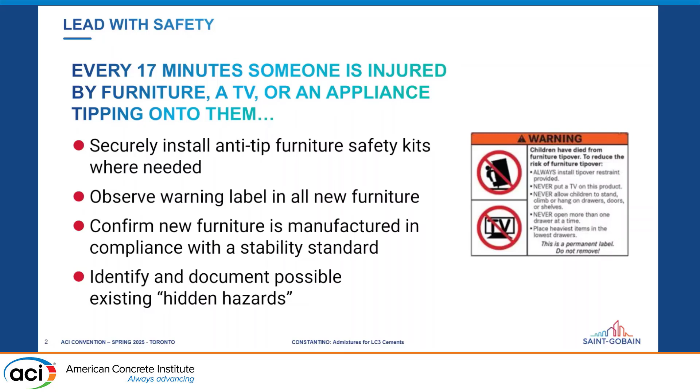And you do that because in the United States, every 17 minutes, somebody is injured by a furniture tip-over type of accident. So if we can avoid it, please, let's be sure we keep our family safe. And when you buy furniture, there is an ASTM for that. I know we look at ASTM for testing slump and air and whatnot. There are ASTM standards specifically to test furniture tip-overs. Be on the lookout for it, and we'll be a little safer.

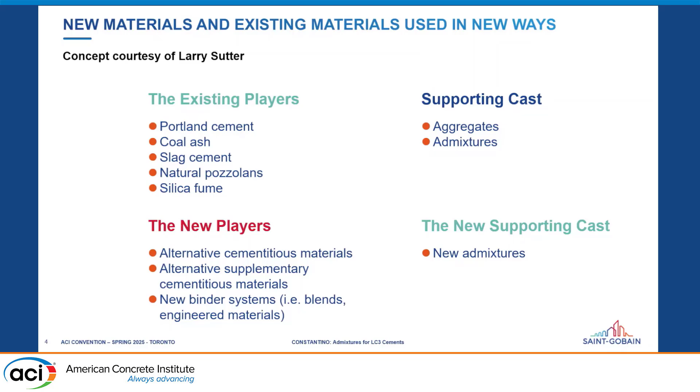And just as I mentioned that the fly ash is no longer fly ash, but it's coal ash in the spec, the same is happening across the board. The same 595 standard that you might have used in the past is not the same as it used to be. So a lot of it means you can do more than you thought you could. All you need to do is go back and reference some of those standards.

And when you do that, you'll see that the LC3 cements that we're going to talk about today, technically speaking, there's no impediment for them to be manufactured. The trick is going to be the pairing with the market and when the technology actually is scaled up to perform.

I have listed here also, courtesy of Larry, a bunch of updates in terms of what's ahead, a lot of activities in progress. So we will be able to have those alternatives that I talked about much more up close and personal in our regions. There may be more advances in one geography in North America, but it's going to be throughout our industry overall.

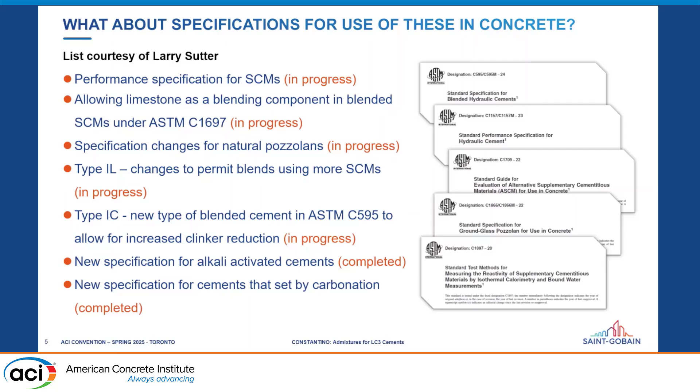So I'm talking background about the LC3 cement, right? And I'm saying all this is new, or sounds new. But then I have to recognize Karen Scrivener, who was here in the convention. If you haven't met her, she comes here every once in a while. She actually, 17 plus years ago, said the following: this material, and I'm going to ask you what the material is, has the potential to cut CO2 emissions related to the cement by more than 400 million tons a year at a global scale. What material is that?

Calcined clay. Okay, so I'm done with my presentation, right? So, thank you. We can all leave early.

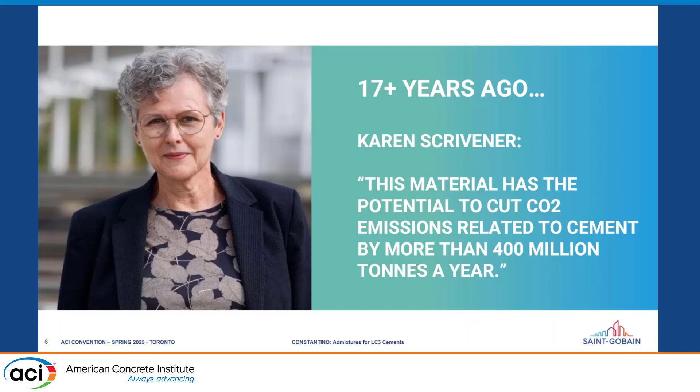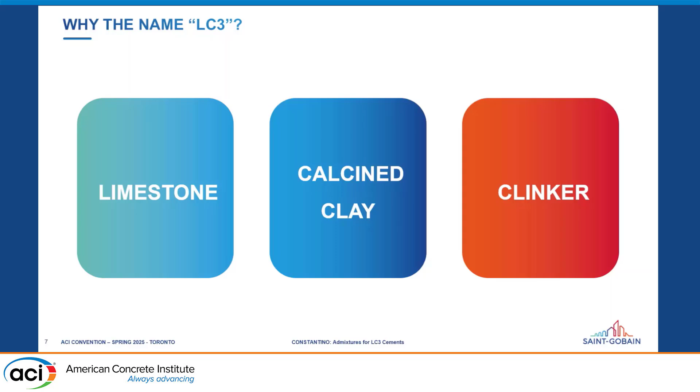Absolutely, calcined clay, but I don't know if everybody is aware of that, so I decided to just make a whole slide for it. Why LC3? And I think it should be obvious. There's an L in limestone, there's a C in calcined, there's a C in clay, and there's a C in clinker, so LC3. They actually put it with a 3, usually as an exponent. But so LC3 plays a role in this, and that's, again, the cement that we're going to concentrate on.

That being said, this is one lever that the industry is pulling to achieve lower carbon intensity in concrete. It's one of them. Doesn't mean it's the only one. And when you look at the alternatives that I was talking about earlier, these are the new SCMs, or old materials being used now differently. You can see a whole series of options out there that are going to be entering the market because of those standard updates that I just mentioned.

Now, why do we need this? Because LC3 has got one edge over a lot of these other things. Everybody's talking about how much slag cement we're going to have in the future in terms of volume. Is it going to be available in all the markets? With coal ash or fly ash, many people are saying, well, now we've got to harvest because there's not enough fresh ash generation. And how long is that going to go?

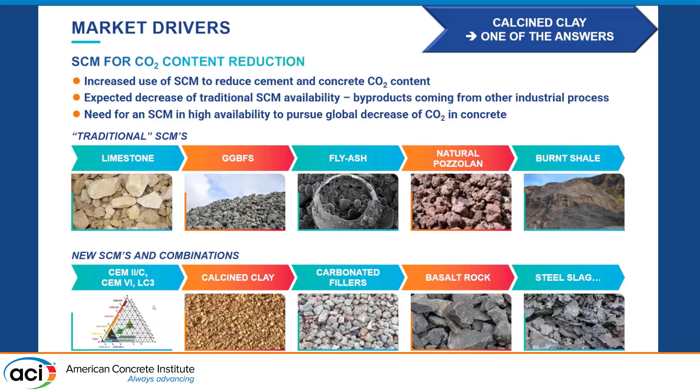And so the question is, how can we do that in the most practical fashion? And that's what gave birth to the calcined clay concept. At this point, there are probably more than 40 now, but 40 cement producers in about 25 countries working on LC3. So that's an up-and-coming attraction. Just like IL surfaced and appeared in many markets very fast, it'll be probably another 2-3 years maybe that we're going to start seeing the entry of these kinds of materials, at least in the United States.

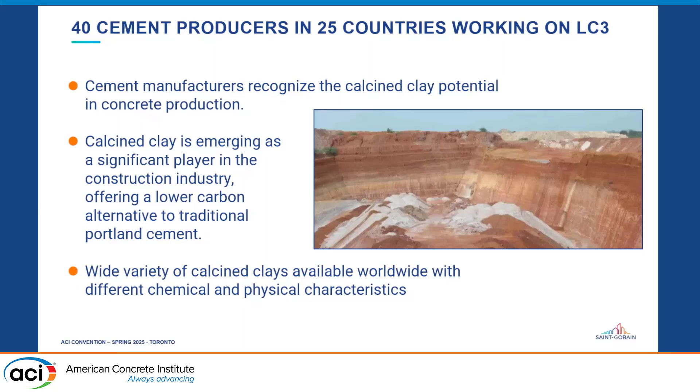It is already present, for example, in Colombia. I know we've worked on that there. And Europe as well. So other parts of the world are already seeing it. But I'm just talking specifically US, maybe a couple of years away, given that there's some investment devoted to prepare industry to have calciners on site to prepare the LC3 formulation. So an up-and-coming attraction there.

And the why behind it has to do with just pure math. If you already have clays all over the world and you already have limestone all over the world, you can still have clinker. And now with material like calcined clay all over the world near cement plants, you can actually have as much powder as you need. If you compare those two boxes over there, clinker, calcination temperature 1450 C plus or minus, overall round figures, you're going to look at about 800 kilos of equivalent CO2 per ton.

Now, the calcined clay is not zero, and many of us are used to saying, yeah, I'm going to put ash in my concrete so that every ton of cement I get out is a ton of savings of CO2. It's not a binary 1-0 situation here. Calcined clay does produce CO2, but because the calcination is at a much lower temperature and so forth, the process can actually save a significant amount of CO2. So even though you're still going to be making CO2, you need other levers for the net zero approach. This one actually helps tremendously to cut the binder part in terms of emissions attributable to the material itself.

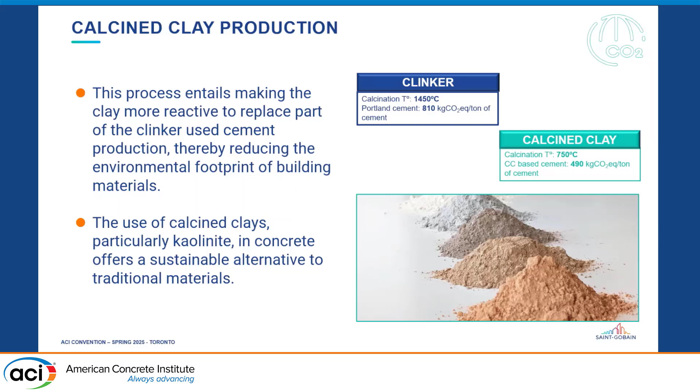And the formulation, if you will, just compared to what we have of ordinary Portland cement, which tends to be just clinker with a little bit of gypsum, and that gives you the ordinary Portland cement concept. The formulation would be proportioned as such. About half would be the remaining clinker that you used to know as Portland cement clinker, but you would also have 30% of that volume be the calcined clay. And then you would add about 15% limestone, which is where the industry is right now, with your gypsum.

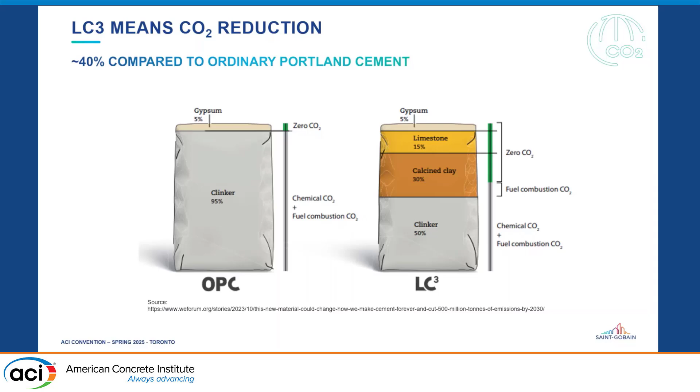This is probably not final in terms of what will be unique in your market, but directionally speaking, this is a formulation from the LC3 concept. So as background, I wanted to offer this as a starting point. And now we get to actually replace some of the clinker with the calcined clay. Yes, I have a picture of a fancy instrument because a lot of the testing that we talked about earlier, I think Georgia Tech is really doing, they put a picture of all the instruments that they're using to characterize materials in the lab.

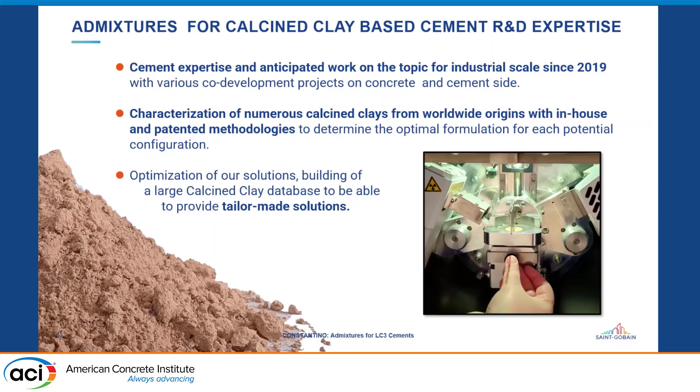You're going to need access to good friends, collaborators, maybe alliances with organizations, companies, what have you, to help you navigate the waters, because you will have to do some work to characterize these materials in a way that you can actually address the performance needs. One way to address performance, the way we do it, is you start looking almost like a spider web, and this is representative. It's not the only one. Other people can do it differently. But you're going to look at the opportunity where the variety of clays are going to give you different performance.

This blue line is one particular calcined clay. This orange is another calcined clay. Which one are you going to get? You're going to have to do the work to find out. And work with your suppliers, your consultants, your team, your experts to do that. Those charts on the right-hand side are basically a summary of different calcined clays that we have actually investigated in our facilities, among others, because we've done it across the globe. But each one is a different calcined clay.

Which one is for you, again? You are going to have to understand, for example, in the colors in the bar, how much is quartz, how much is kaolinite. And that word, you will remember me. When you look at LC3 and you look at calcined clay in the future, kaolinite is going to be one factor that you're going to pay attention to.

So if you remember one thing from today, it's that you're going to be looking at that. Just like today, you say, well, I want to know what my C3S is. Everybody wants to do that in traditional ordinary Portland cement. You want to keep an eye on that, and that's going to be one of the conclusions. So I'm telling you what I'm going to tell you, I tell you, and then I tell you what I told you, right? So remember that one, because overall it's going to be important for you to keep an eye on that.

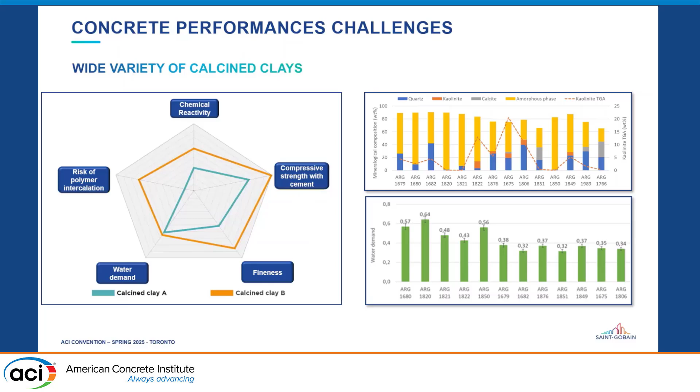You see the diversity and the variances in terms of what's in the calcined clay, and you will see the impact when it comes to water demand. It could be double from one to the other. And we are used to using chemical admixtures in order to deal with water demand. So what product you're going to need other than water to control that is going to be important. Particle size distribution also varies widely.

So you can imagine that in order to tune your performance, you're really going to have to have a good handle on it. So in a way, I'm saying, let's fasten our seatbelts. It's going to be a fun ride ahead. If we do it in anticipation of what's ahead, then we can put our arms around it. In other words, there's work that we should start doing now so that when this comes about in 2 years, we basically have connected the dots in a way that's efficient.

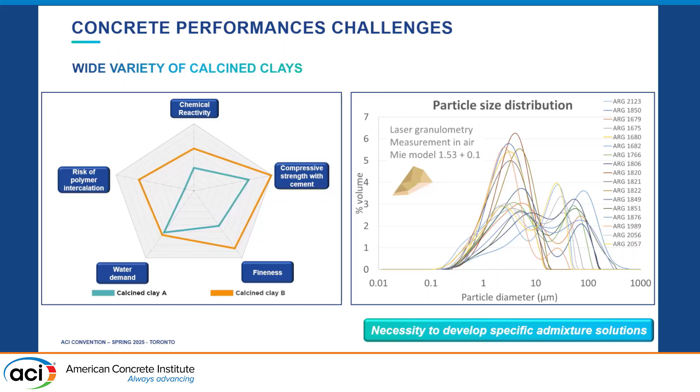Very simple, and I'm glad that Andreas and others touched on these properties, so you already are experts. This is actually yield stress, so the higher the number, the more difficult to move that material. The black line is what you would have, and this is representative, from zero time to 120 minutes. You can see that it's a high number, so it's high yield stress to make that move. That means it's tough to move if you start with nothing.

And then if you use some workability admixture, you see that now it's easy to move early on, but as time goes on, it gets more and more difficult to move, right? So that's not desirable, but a traditional admixture probably is going to give you the red line. What we're saying here today is that by doing the work that I said, that spider web, and characterization and alliances with your partners, you will be able to come up with what the chemistry needs to be so you get the green line, which is basically the holding of the slump, as we call it, and as Andrea mentioned, from the job site to the field.

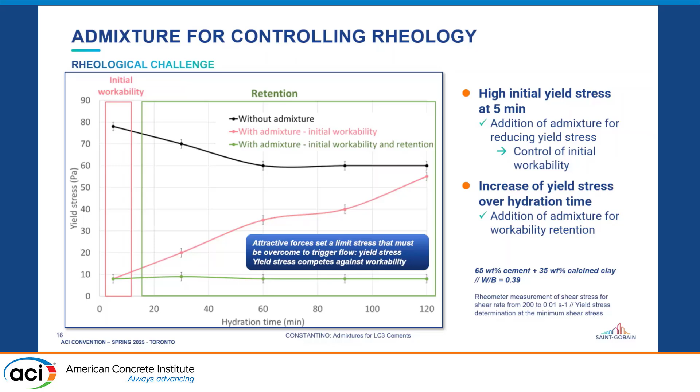So it's going to be important to work together on getting that answer. And the reason is, otherwise you're going to have the dash line, which is conventional admixtures. You put it in, it's going to give you the work at the beginning, but over time it's not going to work. And the idea, as the solid arrows point out, is how do you raise those up with the particular materials in your area?

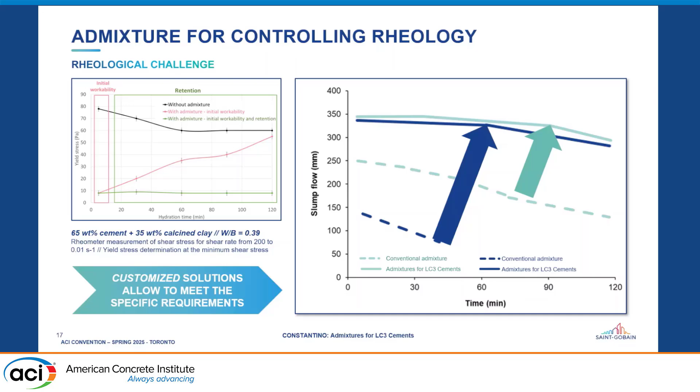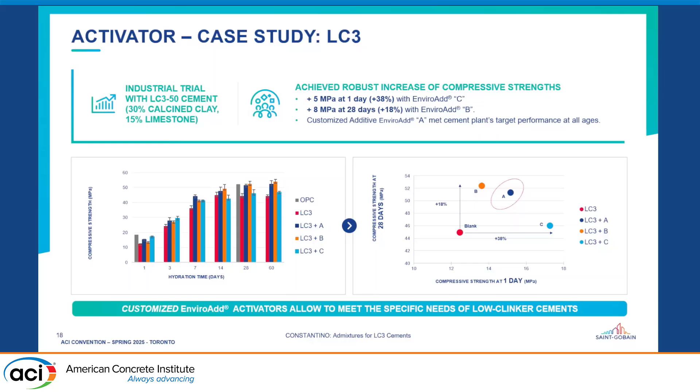Or vice versa. You may be more focused on later age, or you could find a balance, which I strike as A. That may be the happy medium. You give up a little bit here, you give up a little bit there, and you're able to get the performance that you aspire to. So this is what we have done, but you have the power in your hands, thanks to Karen again.

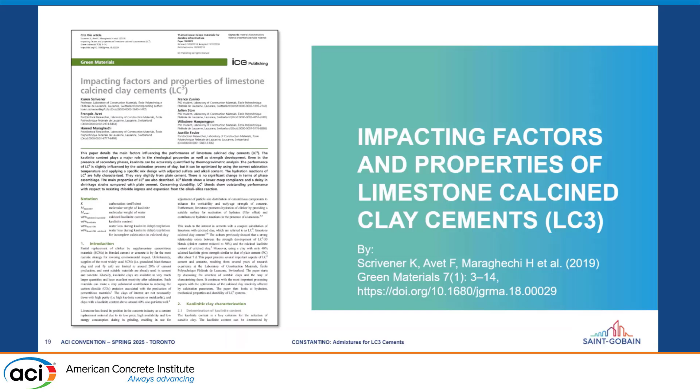She actually published this paper back in 2019, and it's a very detailed paper in terms of what you can do to do that assessment yourself with your resources and with the people that you may find can help you with that. I'm going to make it easy for you, so you don't have to read it. You just get this slide.

Key items. But the first word that I have up there is the one I told you need to remember, because the kaolinite content plays a major role in the rheological properties as well as the strength development. Remember we talk about C3S, we're experts with clinker, right? Well, with calcined clays, you're going to have to look at the kaolinite content.

Now, I also have here another of your best friends. You may not have access to thermogravimetric analysis. Find a friend, phone a friend, because it's going to help you to be able to characterize these materials in the future. And this test, the R3 pozzolanic test, there's an ASTM for that.

I have been saying it, but I'm going to say it now clearly. When I said collaborate with your alliances and partners to get things done, this is an example of how RILEM, for example, in Europe, did a bunch of testing, but they were taking forever to come up with development of a test method that was standardized. So RILEM, through Karen, shared the data to an ASTM committee. Then they got the ASTM standard developed, and now they can reference it in Europe. So this is a way of bridging the Atlantic.

We need to bridge the world with collaboration. Collaboration is going to be the name of the game to be successful. If we try to do it alone, you can, wish you luck. The idea, again, is collaboration to get these things. This test, if you're not familiar with it, is relatively recent, but it's been used in research quite a bit. I suspect it's going to be more common in the field going forward.

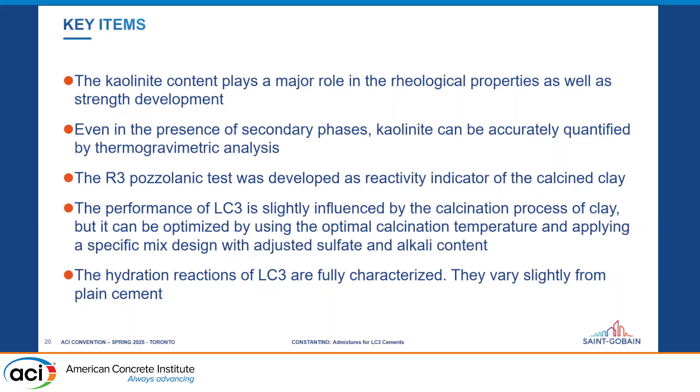And just to remind you of the importance of kaolinite, I repeated that bullet, so if you didn't take a picture of the previous slide, you get it now. The kaolinite is going to be very important. And here's the trick, about 40% is actually necessary for the LC3 formulation as I described it, in terms of the 50%, 30%, 15%, 5%, to give you the equivalent performance, adequately treated with admixtures, in terms of workability, strength,

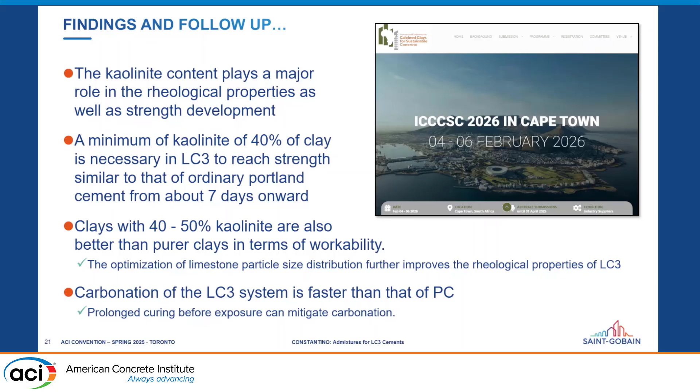and what have you. And too much of a good thing can be a bad thing, right? So I highlight that clays with 40 to 50% kaolinite content are probably better than pure clays in terms of workability. And then there's a lot about carbonation in this day and age. There's just a bit of a delta there in terms of carbonation. We might want to consider that in the future. But at this point, I'm going to just sum it up with the high bullet items.

The use of calcined clays is one of the levers to reduce CO2 in concrete. There is a broad range of clays globally, but that's the good news, that we can scale up and have millions and millions of tons of this product and not necessarily suffer the fact that it may be here this month and 6 months from now I don't have a delivery. They incorporate the calcined clays, and the calcining is important to basically control the performance.

And there is proprietary, as I showed you, our spider web, but then there's the paper from Karen that can give you that ID for that clay so that you can address the performance and get it to do what you need. Bottom line is, it's going to be hand-in-glove development, so that what you have and what you need gets to work for you and may not work for somebody else.